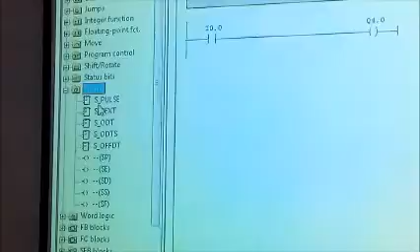All right. So first of all, I am going to begin with timers, and see, here is the option on the screen. The moment you click on timers, here we are getting names: S_PULSE, S_PEXT, S_ODT. In the same fashion, ODT is O-DT. These are the names. This ODT is the on timer. Why has this name been written in this fashion?

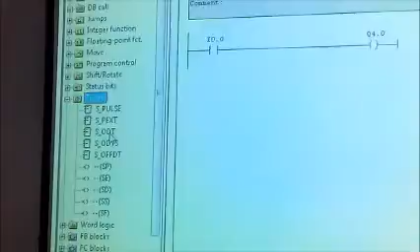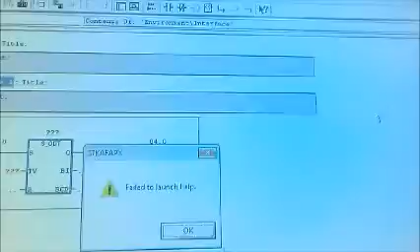Just see here. Just select the network and double click here. This is the timer ODT, but I wanted to say this is the on delay timer. This is on, right? So just select it first and go to F1. Click. This is not appearing because in Windows 7 it doesn't appear. If this were Windows XP, the help page would have appeared here. That page is not able to open here because of that. But this is the on delay timer.

So I am deleting it and want to show you the pulse timer. Why? Because we know the property of the on delay timer. That is why I am not using it. On, off, and retentive, we know the property. So pulse extended timer, what is the property of pulse? So first of all, I want to fulfill the criteria of a timer. After that, we'll let you know.

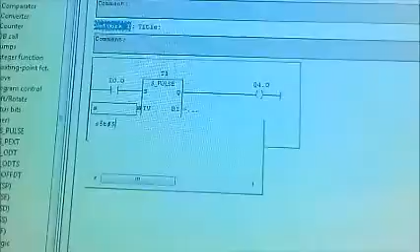Here is the T1. I am giving an address T1, and here is the TV. So I am giving S5T# whatever time you prefer, like 2, 3, 4 in seconds. So 5, and I am writing here S, 5 seconds, and again press enter. This value has been accepted. See, this is the code for the S7-300 timer. Using this, you can set the preset value to the timer. Otherwise, you cannot. Then here is the reset terminal.

At the reset terminal, I am giving an address like I0.2, even I0.1. See, it's not necessary to give an address on reset. It is up to you. If you want to give, then give, otherwise leave it. Why? Because the pulse timer has no need to reset. The moment you withdraw electricity, it goes off. But so far as the retentive timer is concerned, that has got a property: once it achieves its preset value, it becomes excited and stays set. So until that timer is reset, it will not work the way it was working earlier.

So to work with a retentive timer, we need to reset. But on, off, pulse, pulse extended, it's not necessary to reset them. But the port has been given.

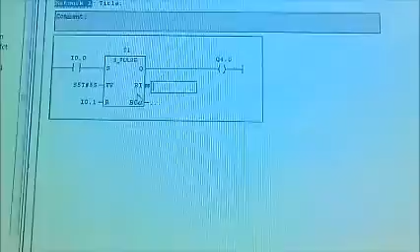If you wanted to reset it during the achieving preset time, you can provide power supply on reset, and that will turn to 0 for this purpose. This is the BI, equal to accumulator. So whatever time you have given to the timer, the moment you start giving power supply, it starts achieving the preset value, and that value will be shown here - what value has been achieved by the timer with respect to power supply. That time will be projected here. So there is no use now, but in future we can use it.

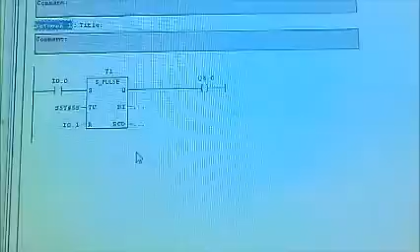So I just wanted to show you in which fashion it provides delay. Here is the output, which has to glow with certain delay. This is the timer that provides delay. But this is not an on-delay timer which provides delay after a certain time. This is quite different, called a pulse timer. The property of a pulse timer is to provide output as a pulse.

In a pulse, what happens? The moment you provide power supply, it shows on the output. It appears on the output as long as you keep giving power. But the moment you interrupt, the moment you withdraw electricity, it goes off at the same instant. In the same fashion it works here, but with respect to time. That is why this has been named pulse timer.

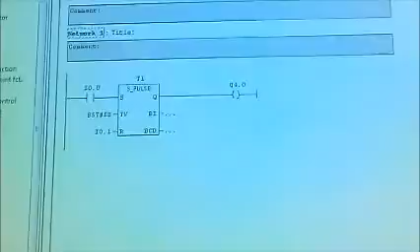So what I'm doing is I'll press, but before that I'm saving and downloading here. But this program is not being downloaded because the respective page is not open where this program will be downloaded. That page is called the simulation page. So we need to open that page and see.

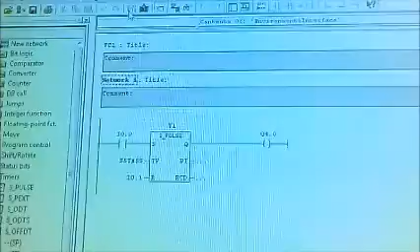I have opened it and just kept it minimized. Now go to the main programming page, save, and click on download. And again just click on this monitor option, then go to the simulation page and bring it into run mode.

Just go to run, and here is the switch I 0.0, just press here. The moment you press... but this is not on, just one more thing I have to do. Click here and stop, and we need to download all the things from the beginning.

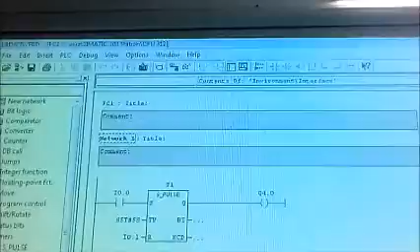So this is the program, and again this is the OB. This must be downloaded again because I had cut the simulation window. So we need to download all the things like the hardware window, OB and FC. Only then this will execute the task. Again go to the programming window.

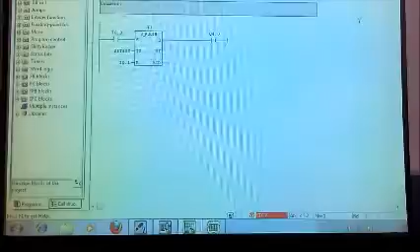FC, and need to click on monitor. This is coming in run mode, stop mode. Again I'm clicking on run. This is running, and the moment you click on I 0.0, the output glows, but after achieving the preset value this goes off, even though power supply is being fed continuously to the input. So this is the property of the pulse timer.

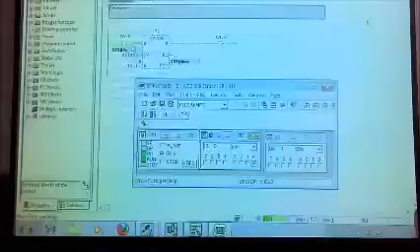The moment you start giving power supply to the timer, it allows output at the same instant. But whatever value you have set for the timer as preset time, it provides output for that time. The moment that time gets over, it stops giving output. Input is continuous, but it doesn't provide output again till you interrupt the input once and provide it again - as I provide, again I am getting it here.